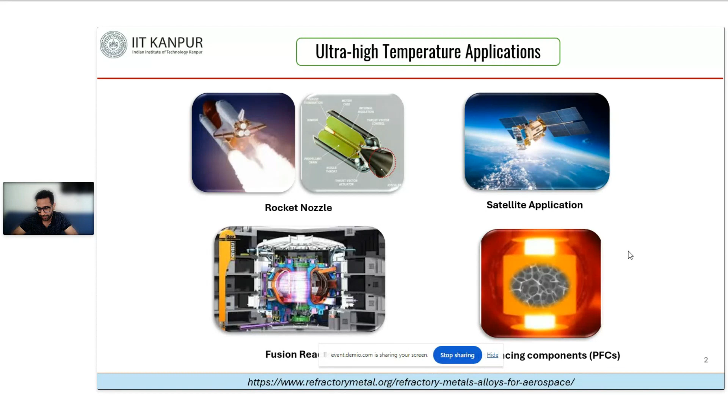However, the refractory metals, which have very high melting points and high mechanical properties, can be used in this particular application. However, they have their own disadvantages, like low deformability and very poor oxidation resistance. So in order to deal with some of these problems, a new design methodology was developed, where five or more elements are mixed in equal or near equal proportion to form an alloy. Since the developed alloy has a very high configurational entropy, they are generally called high entropy alloys.

So one of the most important parts of the high entropy alloy design concept is that we can explore the central space of the phase diagram, and we have more options to develop these alloys. Similarly, the high entropy alloy design was used to develop refractory high entropy alloys, where the refractory metals are the principal elements.

And one of the initially developed refractory high entropy alloys, which was the molybdenum niobium tantalum tungsten alloy, when it was tested, showed a remarkable property in the temperature range of 1200 Kelvin to 2000 Kelvin in comparison to the conventionally used high temperature alloys like Inconel 718 and Hastelloy.

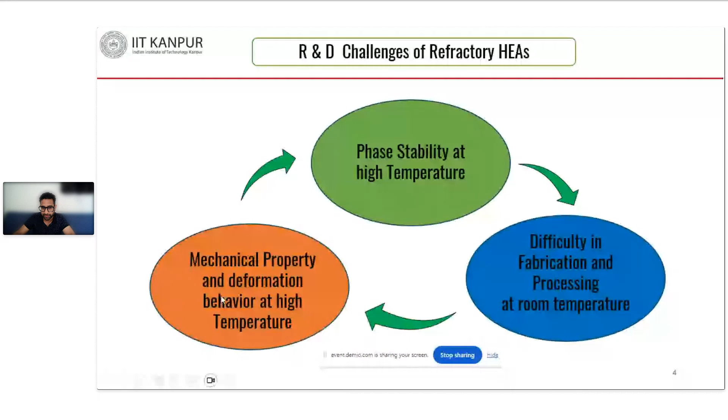Also, the mechanical property and the deformation behavior: since they are new and they have high configurational entropy, the mechanical property and deformation behavior need to be tested and checked. So in order to deal with these R&D challenges, this is our strategy: we have used the high entropy alloy design concept, since it was already shown that this alloy design concept makes alloys with better properties than conventional alloys.

So we have used this design methodology, and to predict the phase stability at high temperature or even at room temperature, we have used CALPHAD modeling. CALPHAD modeling is a state-of-the-art technology based on thermodynamic principles. So it is a very robust method to predict the phase stability.

And to deal with the fabrication process, we have used the vacuum arc melting process, and to study the deformation behavior, we use high temperature nanoindentation testing, which is robust and also requires a very small amount of material. Because they are new materials, we are also limited in the amount of material which we have.

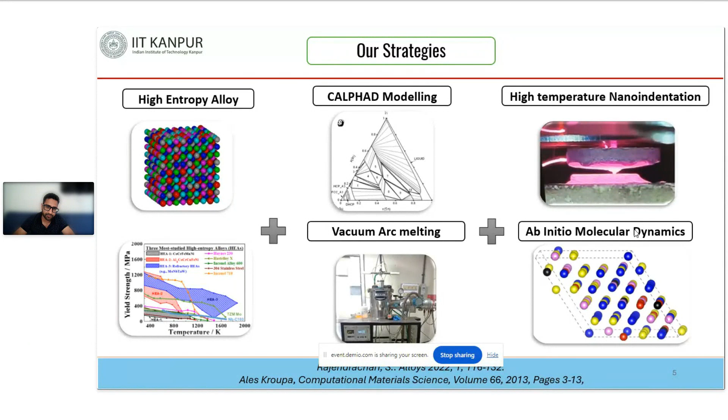And to understand the deformation behavior at the atomistic level, we have used ab initio molecular dynamics simulation, which gives accuracy and is also able to simulate a decent number of atoms in the supercell. So before going deep into the CALPHAD modeling, I want to discuss the thermodynamics of high entropy alloys and also the CALPHAD modeling.

So the CALPHAD models work on the principle of minimizing Gibbs free energy. The Gibbs free energy of any phase can be defined as a summation of the Gibbs free energy of the individual constituent phases, the ideal Gibbs free energy of mixing, and the excess Gibbs free energy. But in our modeling, we consider the pure element as the standard state. Since the pure element is the standard state, the constituent Gibbs free energy of the constituent phases

we consider as 0, and to predict the Gibbs energy of phases, we consider the ideal mixing of this alloy, and since the ideal mixing Gibbs energy gives the configurational entropy, we have directly used this term. So at the end, the Gibbs free energy will equal the excess enthalpy minus T times delta S, where the entropy is the configurational entropy due to ideal mixing plus the excess entropy.

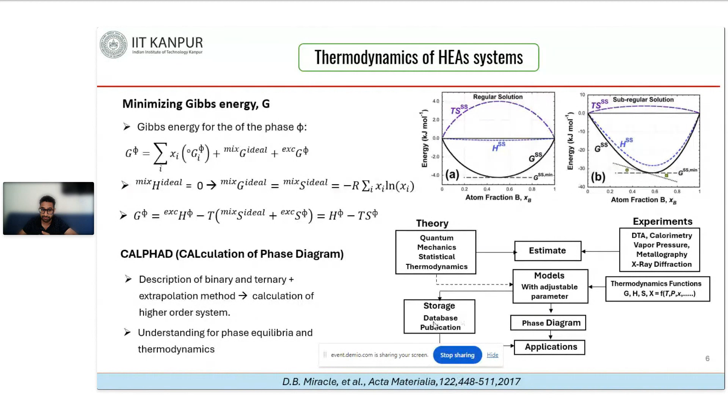And the model contains thermodynamic functions, where the enthalpy, entropy, and Gibbs free energy are considered as functions of temperature, pressure, and elements. From the binary and ternary phases, it is extrapolated to higher order systems like quaternary and quinary, and understanding of the phase diagram was developed and applied to real applications. So we jump to our CALPHAD modeling approach.

In the high entropy alloy designing concept, we have taken 9 elements, all refractory metals. From these 9 refractory metals, we selected 5 metals at a time, because we want to make a quinary alloy, and initially we take all the principal elements in equiatomic composition, meaning their chemical compositions are in equal proportion. From 9 we select 5, so it becomes 9C5, equal to 126 equiatomic combinations. These 126 equiatomic combinations we tested for phase stability.

We predicted their phase stability through a MATLAB code coupled with Thermo-Calc, and from 126 equiatomic combinations we got only two best alloys: the molybdenum, niobium, vanadium, tantalum, tungsten alloy, and the chromium, molybdenum, tungsten, rhenium, vanadium alloy. These two alloys have large thermal stability of the single BCC phase, stable over quite a temperature range, from 700 Kelvin to almost their melting point. In the chromium, molybdenum, tungsten, rhenium, vanadium alloy, the single BCC phase is stable from 1000 Kelvin up to the melting point.

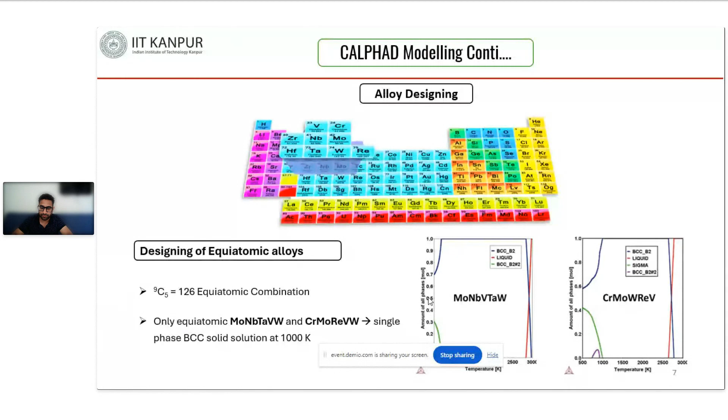But even though this phase is stable from the melting point down to 700 or 1000 Kelvin, it transforms into other phases when the temperature is lower than 700 or 1000 Kelvin. So the equiatomic alloys we have tested. Then we jump to non-equiatomic alloy compositions in search of an alloy which shows large thermal stability over a wide temperature range. Since we got these two equiatomic alloys showing good results, we tested non-equiatomic compositions of these alloys.

What does non-equiatomic composition mean? Earlier, in equiatomic composition, all the principal elements had equal chemical composition. Now we vary the composition of each individual element from 5% to 35%, generating different alloys, and in this way we got 1451 alloys for each equiatomic alloy. To predict their thermal stability, we have shown the thermal stability of the phases in the form of a ternary phase diagram. Here it is a pseudo-ternary phase diagram at 1000 Kelvin, 600, and 400 Kelvin.

Now, how to understand this phase diagram. There are different colors here, and the red color shows those alloys giving 100% single phase structure. So if it shows red, that alloy has a 100% single phase structure.

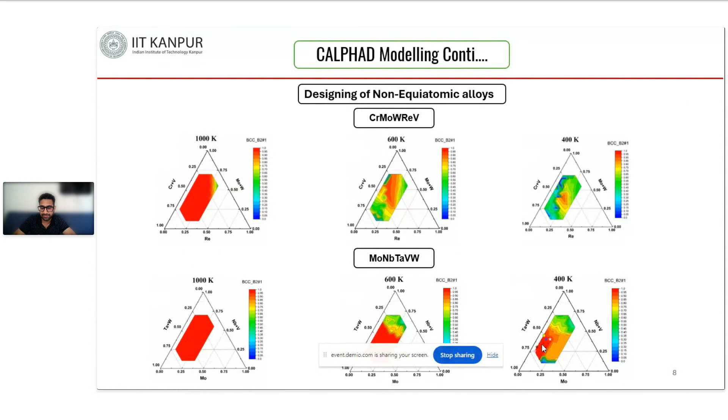So once we got this result from CALPHAD, we wanted to validate this result with experimental techniques, and we used vacuum arc melting to prepare these alloys and did XRD testing. We have done the XRD testing on more than 6 or 7 alloys, and we found all showing single phase structure.

Also in the microstructure in the SEM, they show a dendritic structure, but we do not see any traces of second phase particles. We have done the TEM analysis, the bright field and the SAED pattern, and in the SAED pattern we got the reflection from the single BCC structure from the 111 zone axis, showing that it is a single phase structure.

After validating that this alloy is showing a single phase structure, we tested their mechanical properties and found that the nano hardness and the elastic modulus are better in comparison to even the equiatomic counterpart. So we can say that the non-equiatomic alloy is showing better phase stability, and also a better mechanical property than its equiatomic counterpart.

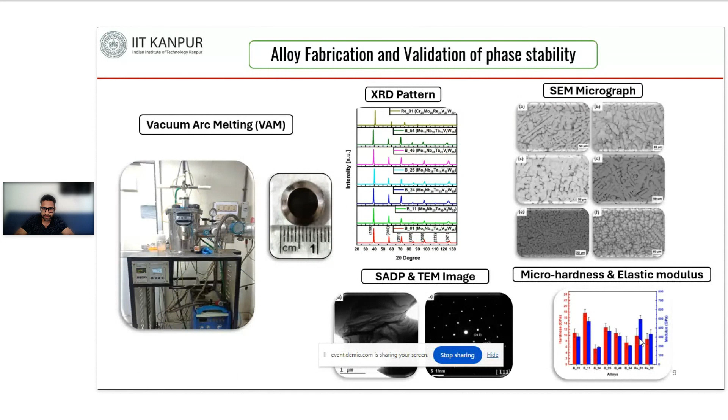So after validating their phase stability, we tried to study their deformation behavior, and for this we jump to indentation testing. Before going into the details of the indentation testing and its results, I want to give the basics of indentation testing, starting with conventional indentation testing.

In indentation testing, we measure the hardness value, and hardness is the resistance to permanent deformation. So how things work here: we have an indenter of a particular geometry, and we press the indenter with a static load on the flat specimen surface, hold it for say 10 to 15 seconds to maintain equilibrium, and then remove the indenter.

After removing the indenter, there is an impression made on the sample surface, and we measure the area of this impression in the optical micrograph to get the hardness value. So hardness will be equal to the force applied divided by the area of the impression made. If you see the geometry, it's a square shape.

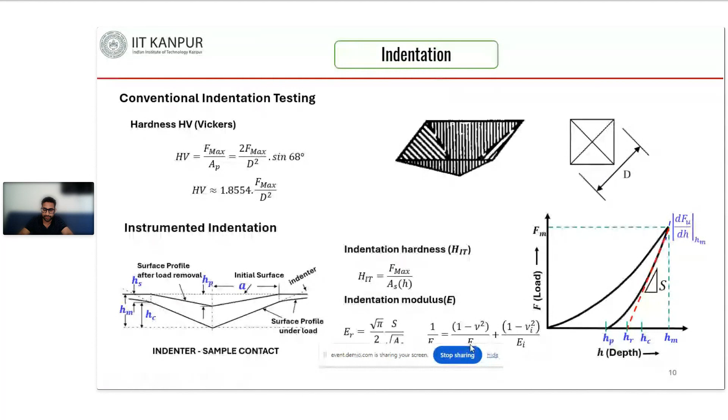Similarly, for the indentation modulus, we can measure the slope of the unloading part and relate this slope, or stiffness value, to the reduced modulus. The reduced modulus is the combined modulus of the indenter and the specimen material, so from the stiffness we can calculate the reduced modulus. And if we assume that the indenter and the specimen behave like springs in series, we can calculate the modulus of the specimen. This is the formula, with the modulus of the indenter and the Poisson ratio of the indenter. So this way we got the modulus and the hardness value.

Coming on to high temperature nanoindentation testing, there is complexity involved, because at high temperature there is a chance that the specimen gets oxidized, and even that the indenter tip can react with the material, deteriorating the indenter. Also, there can be a temperature gradient between the indenter tip and the sample, which leads to thermal drift and ultimately a change in the hardness value. So that can be inaccurate.

To solve the problem, we took help from Micro Materials. They have a state-of-the-art NanoTest Xtreme setup, where they use high vacuum in the range of 10 to the power minus 6 millibar, which reduces the possibility of sample oxidation. They have a high temperature cubic boron nitride Berkovich indenter tip, which is quite stable up to around 900 or 1000. And they also have a tip heating setup.

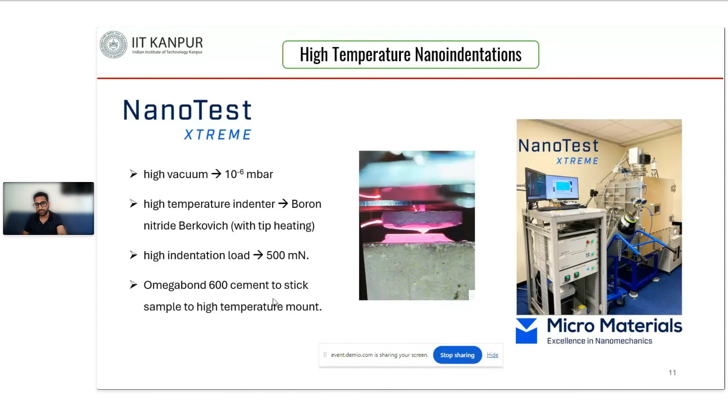During the indentation testing, along with the sample, the indenter tip is also heated, so the temperature difference between the tip and the sample is negligible, and the possibility of thermal drift and the error in hardness and modulus measurement will be low. They are also using high indentation load, so the error will be minimal. Along with this, they use Omegabond 600 cement to stick the sample to the high temperature mount, giving better stability. With this NanoTest Xtreme setup, we were able to measure high temperature nanoindentation.

But before the nanoindentation, I did rigorous microstructure characterization to find the grain size and texture information. In the EBSD image we got a random texture, and at room temperature we got a BCC structure. To check the phase stability of this BCC structure at high temperature, we did a heat treatment at 1673 Kelvin for 48 hours, and even at such a high temperature for a long time we got a single phase structure. Then we did nanoindentation tests at 298, 573, 773, 973, and 1173 Kelvin.

So we have done a series of indentation tests at different temperatures, and at a particular temperature we have done 5 to 7 tests to get the average value of hardness. So from this indentation curve we got the hardness and the modulus value.

And to understand the deformation behavior, we have plotted the hardness as a function of temperature, and you can see here the hardness is pretty high, and this can be a result of solid solution strengthening of this material, because they have 5 principal elements here, and they are developed by the high entropy alloy concept. So the movement of dislocations will be difficult in this alloy. So that way they have a very high solid solution strengthening in this alloy.

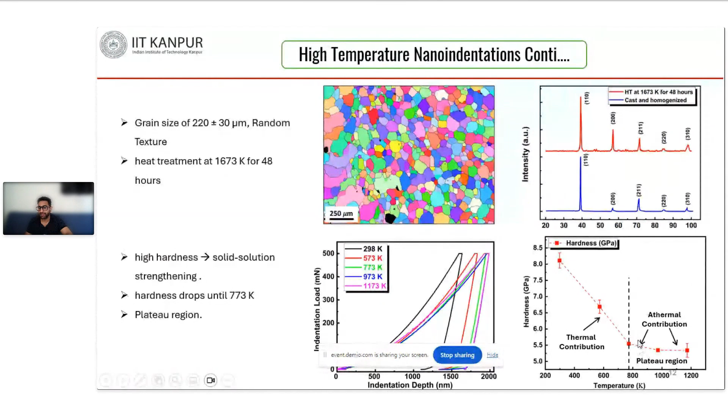the hardness value. But at the same time, because the temperature is high, the super jog can diffuse along the glide direction, and since they are moving in the glide direction, they can relieve some stress. So because of this super jog formation and super jog diffusion, there will be equilibrium between them, and that leads to the temperature independent deformation behavior.

So we have measured the hardness value and modulus value as a function of temperature. So you can see that the modulus value is considerably high, 260 GPa we got at room temperature, and even at 1173 Kelvin we got 245.

Okay, sorry for this disturbance.

Yeah. So we got this value, and when we measured, we got a monotonically decreasing modulus value. And if you see the slope, initially the slope is low, but with increase in temperature, the slope is also increasing.

So in order to compare this modulus value with other alloys, we used the Varshni model, and the alloys studied in the literature, which are hafnium-niobium-tantalum-titanium-zirconium and niobium-tantalum-titanium-vanadium alloys. So when we compare this alloy with the equiatomic alloy, obviously our alloy is doing better, giving a better modulus value.

And also if we see the parameter values, there is an SE parameter and a TE parameter. So the SE parameter will give you the temperature dependency of Young's modulus, and the TE parameter will give us the thermal stability. So we can see that this alloy has a value of 31 for SE, giving relatively higher temperature dependency, and also the thermal stability of this alloy is high over a wide temperature range.

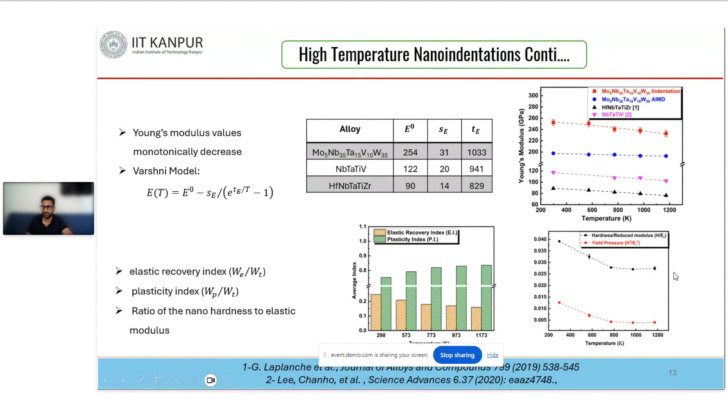So we can say that plasticity is behaving like this: initially the hardness is dropping, the plasticity is increasing, and then there is a stable plateau region. Similarly, we have measured the hardness to reduced modulus ratio and yield resistance pressure. They are also giving similar behavior to the hardness behavior.

So in order to understand this material deeply, we did ab initio molecular dynamics simulation. Before going deep into the details of this simulation, I want to give a brief bird's eye view of all the methodology available in atomic calculation, the computational cost involved, and the accuracy that we get.

Starting with quantum mechanics, density functional theory is the best approach, where electronic and ionic degrees of freedom are treated. Actually, it solves the Schrodinger equation and tries to find the wave function, but it does it in an indirect way. Initially it approximates the electron density and the exchange correlation functional, and tries to find the energy. Once you get the energy of the system, you can calculate the other thermodynamic properties. Obviously this involves computational cost, but it gives very high accuracy.

There is another method, molecular dynamics simulation, where atoms are treated as classical particles, and the motion of the atoms is predicted from an interatomic potential by solving the classical equation of motion, that is Newton's law. We need the interatomic potential to do the MD simulation, and these potentials are based on experimental observation and empirical formulas of known forces, like van der Waals forces and electrostatic forces.

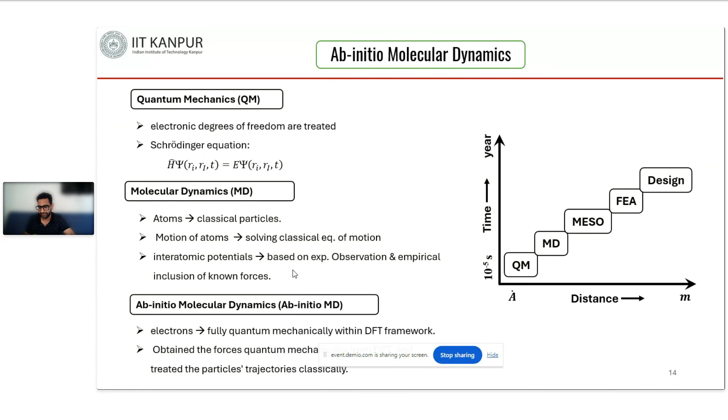So we use this ab initio molecular dynamics approach. First we develop a random structure of the high entropy alloy with the SQS method, special quasirandom structure, using a tool called ATAT, and we develop this random supercell with 100 atoms. Once we successfully developed this structure, we did the ab initio molecular dynamics simulation in VASP and relaxed the structure at different temperatures: 298 Kelvin, 573, 773, 973, and 1173.

Once we got a relaxed structure, we found the second order elastic constants, and from them we calculate the bulk modulus and the elastic constants. We compare the Young's modulus calculated from the ab initio MD simulation and from the experiment. The values are not exactly matching, but we got a comparable result.

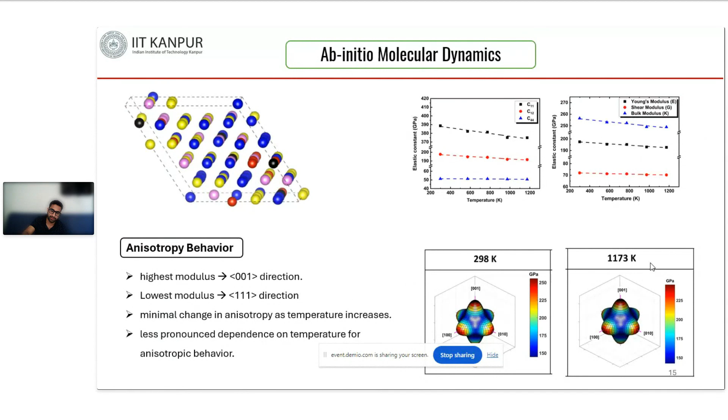So I can conclude that the non-equiatomic alloy gives better thermodynamic stability and mechanical properties compared to its equiatomic counterpart. Its anisotropic behavior is less temperature dependent, and this alloy has better thermal stability. The hardness values initially drop because dislocations are able to move from their locally favorable region with thermal assistance, followed by a plateau region where there is an equilibrium between superjog pinning and superjog diffusion.

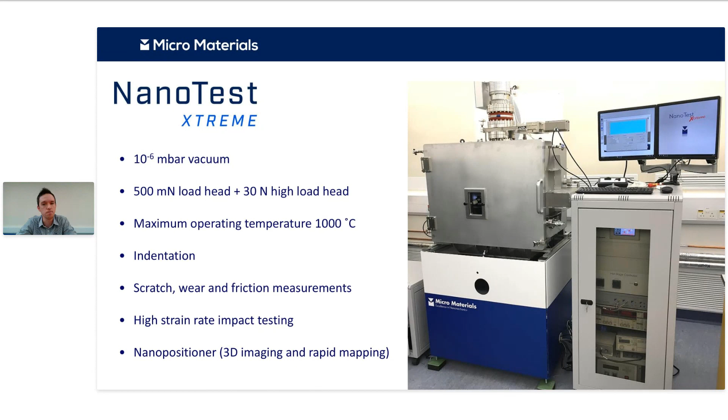So why do we need to use vacuum? Well, this was again mentioned in the previous talk, but two key reasons. Firstly, to eliminate oxidation of the sample, and secondly, so that we can use diamond indenters above 400 degrees Celsius. Therefore, we can use this system to test at higher temperatures compared to an ambient system or even a system that employs gas purge to remove some of the oxygen from the environment.

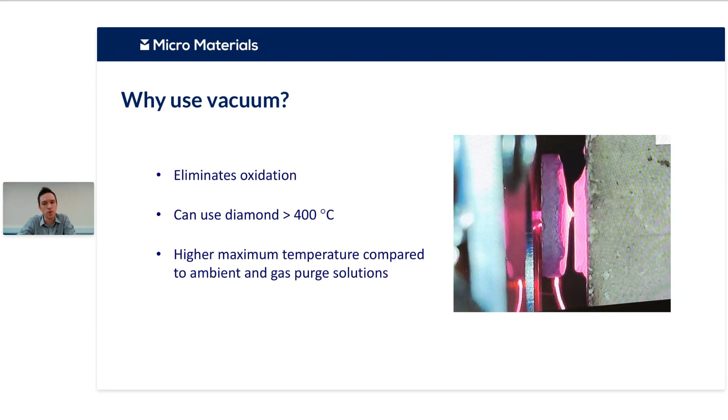So in terms of sample oxidation, of course, many metals and alloys will oxidize at high temperature, and this oxide layer significantly interferes with the nanomechanical characterization that we are trying to do on the sample surface. So we need a way to overcome this limitation. We can perform the test in a protective gas purge environment, for example, argon purge, which is what we use for our non-vacuum system. This is sufficient to slow down the rate of oxidation, but it's often not enough for some metals that are readily oxidized, or if we want to perform long duration tests.

So you can see in these pictures on the right here, we have a tungsten alloy, a metal that very rapidly oxidizes at high temperatures. Even in an argon environment, after 1 hour at 750 degrees C, we see extensive oxidation of the surface. After 1 hour in forming gas at 700 degrees, it's not as bad, but we're still seeing areas of oxidation on the surface. However, in a high vacuum environment, as you can see here on the bottom, at 750 degrees, after many hours, probably more than 12 hours at least, we don't see any visible signs of oxidation.

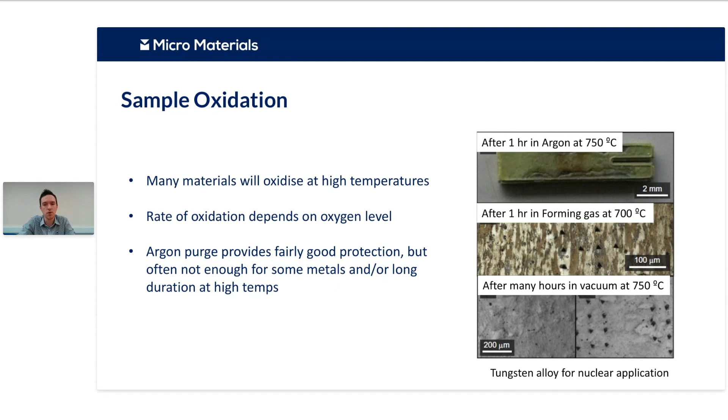Similarly for the indenter, you can see here a list of the most common indenter materials. For example, we have diamond, which will start to oxidize at more than 400 degrees, tungsten carbide 500 degrees, cubic boron nitride 750. Sapphire is inert, of course, being aluminium oxide. But sapphire is probably the softest of those 4 materials, so it will blunt more quickly.

So on the right here, we can see an AFM image of a diamond indenter after prolonged use at less than 400 degrees C. You can see the pyramidal shape and structure is clearly defined, and that is a nice indenter tip. The image below it is the same indenter after just 90 minutes at 900 degrees in an argon environment. So even with this protective purge, we see the degradation of the tip. The pyramidal faces are no longer clearly defined, and the tip is severely rounded. So this is no longer usable for nanoindentation. So again, we need to use high vacuum, i.e. less than 10 to the minus 5 millibar, in order to protect the indenters as well as the sample.

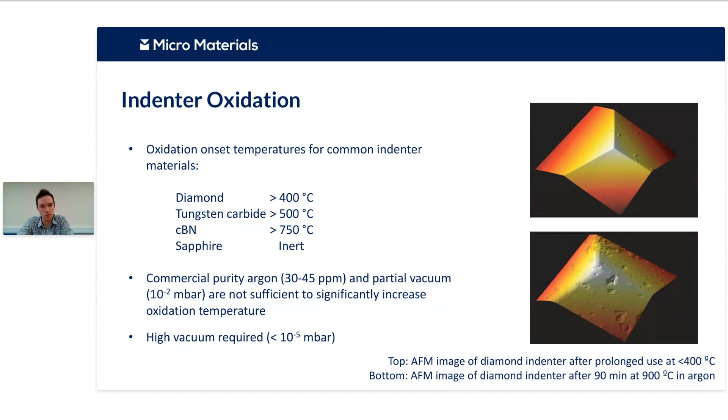So in addition to oxidation, this was also alluded to in Dr. Raturi's talk, we have to consider any potential reaction between the indenter tip material and the sample material. So with nanoindentation, we are generating very high contact pressures. So when we combine that with high temperature, we have the conditions for a possible tribochemical reaction between the tip and the sample. So the most common example of this is when we are indenting steel with a diamond indenter.

So as you can see in this SEM on the left, what's happened here is the carbon in the diamond has been absorbed by the iron in the steel, forming these iron carbides, and that's completely destroyed the tip. Similarly, on the right here, we have another diamond Berkovich indenter, but in this case, we were indenting nickel at 700 degrees Celsius. And again, a similar thing has happened here. The carbon has reacted with the nickel to form nickel carbides, and our sharp point of the tip is turned into just a flat face. So again, that is no use anymore for nanoindentation.

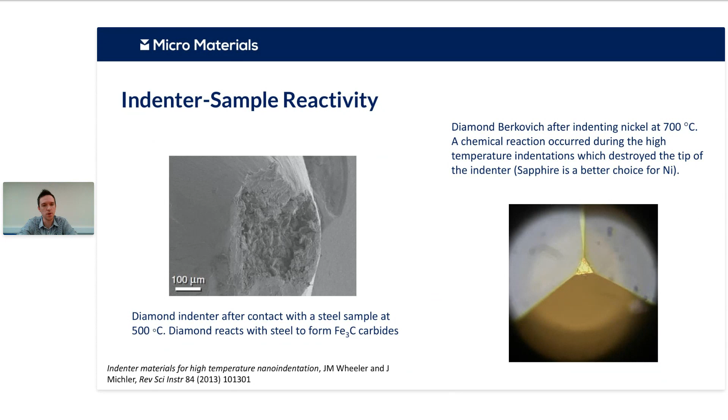I mean, tungsten carbide is the most inert with most of the sample material types. But again, that's one of the softer materials compared to the boron nitride or the diamond. So tungsten carbide and sapphire are more likely to wear because they're just not as hard as diamond and other types of material. So we have to factor that in when we're performing tests, especially on hard materials. The tip rounding will occur much quicker than it does with diamond.

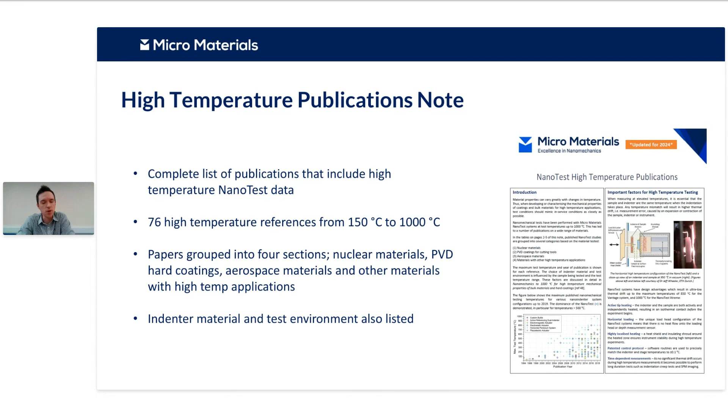And this includes 76 high temperature publications that include NanoTest high temperature data, ranging from 150 degrees all the way up to 1,000 degrees. And these have been grouped into 4 sections: 3 common uses of the high temperature capability in general, nuclear materials, PVD hard coatings, and aerospace materials. And then the final section is just other materials with high temperature applications. So this, we hope, will be a useful guide to you, because in addition to the sample type, we've also listed the indenter material and the test environment. So it may provide a useful guide to see if similar work has been done on the samples that you want to test, and if so, what indenter was used, what test environment was used. So that gives you maybe a bit of a head start in terms of planning your tests.

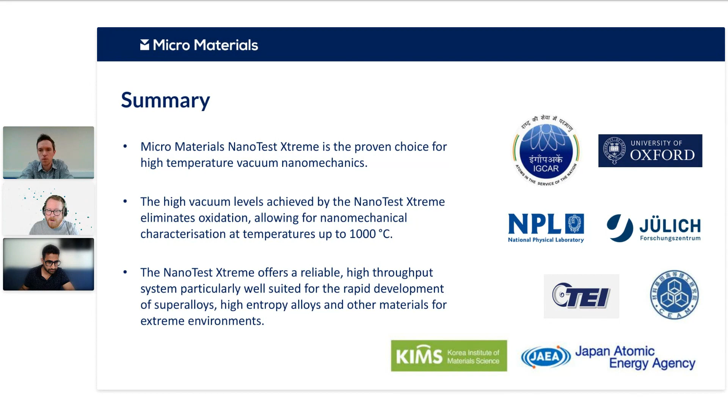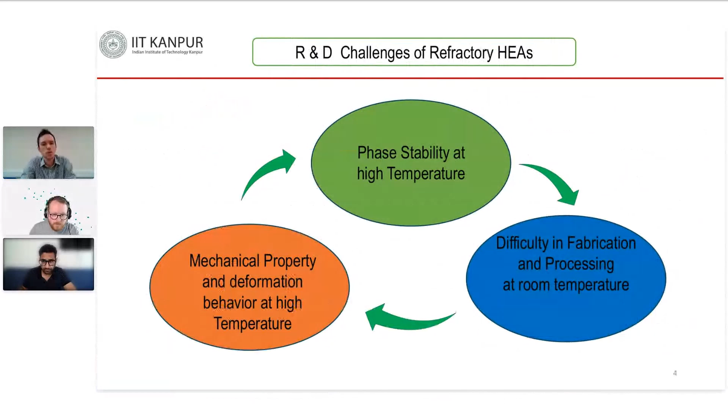Okay, so we got one from Pulami who asks, how is the Young's modulus calculated in nanoindentation? Okay. So should I share my screen? Yeah, let me just quickly scroll through these. Yeah, this is fine. So for finding out the modulus value, we use the unloading part of the load indentation curve. We take the slope of the unloading part of the indentation curve at the maximum load, and this slope can be related with the reduced modulus, and from the reduced modulus we can find out the Young's modulus with this formula.

Okay, brilliant. Thank you. Our next question is from Aditya, who asks, what is the material for the 1100 Kelvin indenter probe? I think Micro Materials used boron nitride. If I am wrong, you can correct me. Right. So I think it is boron nitride, right? Yeah, that's right. Boron nitride. Okay. Got it.

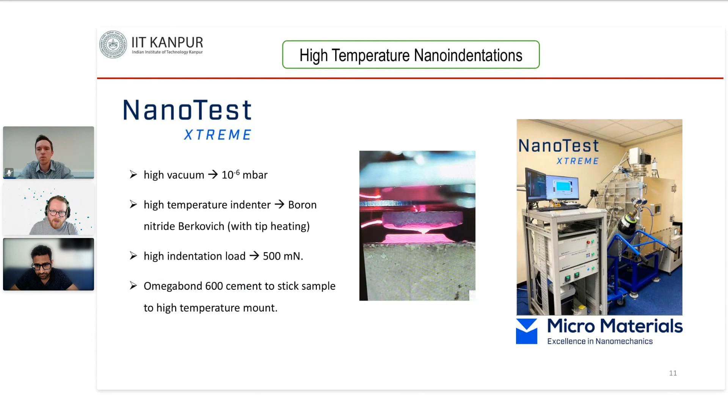Thank you. We have quite a few questions here from Dr. Nath. The first one here is, what is the role of single phase? So actually, if you answer that, why we need a secondary phase in our material. Generally it is used to increase the strength. And since this alloy already has a very high strength, and there is a problem with the brittleness, if you introduce the second phase, it will increase the brittleness problem in a more severe way. So if we get the same level of strength in the single phase, it's better to deal with the single phase instead of adding the secondary phase, which will increase the complexity and also the brittleness in the material. So that's why we are looking for the single phase.

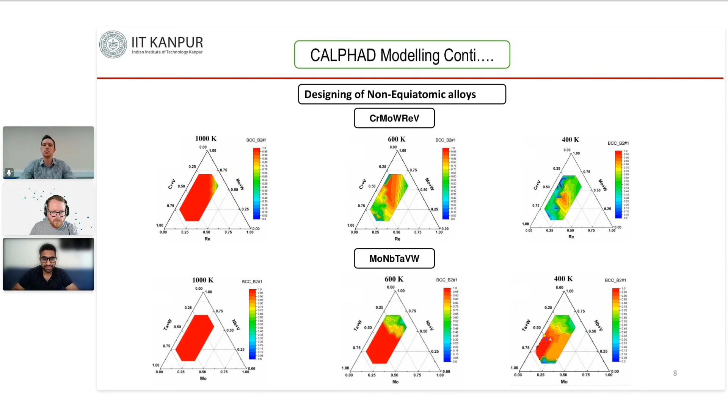Great. We have another question from Aditya, who asks, what is the strain rate of the impact test? I think we have done the indentation test. Yeah. Maybe I can talk about the impact test in general terms briefly. So the strain rate obviously depends on a number of factors, but with the impact test on a NanoTest system, we're able to pull the indenter away from the surface and release the indenter, so it accelerates to the sample surface

with high energy. Typical impact speeds are around 1 to 2 millimeters per second, but with a sharp pyramidal indenter like a cube corner or a Berkovich, we can generate strain rates of 10 to the 5, 10 to the 6 per second. So again, high energy, high strain rate, particularly useful for studying tool coatings. And again, we can do that at high temperature as well. Okay. Thanks, Andy.

Another question from Dr. Nath here, who asks, I think he's trying to ask, are there any post-cast treatments applied to the high entropy alloys? Yeah, we have done the annealing treatment at 1000, and for the phase stability also we did it at 1000 degrees Celsius for 48 hours. But even at 1000 degrees Celsius for 24 hours, it is still a cast structure. So we are not able to remove the cast structure at 1000, but we are able to remove it at 1400 degrees Celsius. Okay, got it. Thank you.